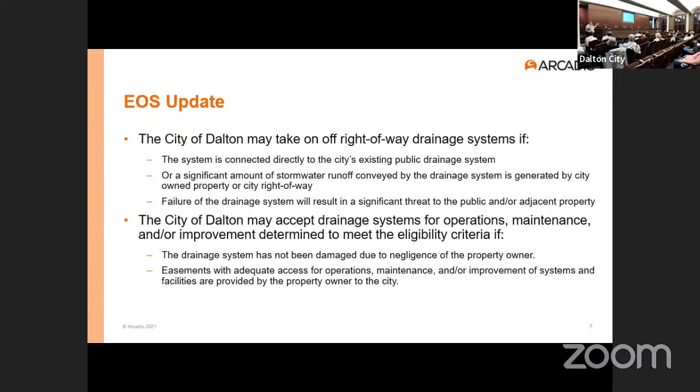And then the other condition is they need to have an easement. An easement is simply a written agreement between the property owner and the city that says here's where the city can work, here's what they can do, here's their responsibilities, so that they're not running all over your yard. It just kind of contains the area where they're responsible and where they're not.

All right, there are a few situations where the city and the taxpayers will not take on infrastructure. First one is non-residential property, commercial industrial properties. They're not going to take on Walmart's drainage system. Walmart's got plenty of money, they can pay for their own drainage. So that's a scenario where the city's not going to take that on.

And then the other one is if a drainage system is located under an existing building. In other words, somebody built a house, and just from a liability standpoint, it's really tough to work on those without causing damage. So they decided this is not one of those scenarios they really want to get in the middle of. If it's going under a home, you can really screw the home up just touching it.

So let's say we haven't met those criteria, but we've got some. So prior to the acceptance of a drainage easement, in other words, they say okay, we think this is our responsibility, public should pay for it, you guys are going to grant an easement if it's on your property. Then here's how the process would go.

Before the easement has to be accepted by the city council. This is not something that Andrew can sign off unilaterally on, or Chad could sign off on. It's got to go to the council. The public officials have to vote on this. The easement would be prepared, but before they do that, there's going to be a corrective action plan.

For those of you who may remember, Jackson gave a discussion not too long ago about the corrective action plan for this basin. He prepared this discussion so that the city council was informed about what potentially could go into this solution, so they can understand the risks and the potential costs to the taxpayers.

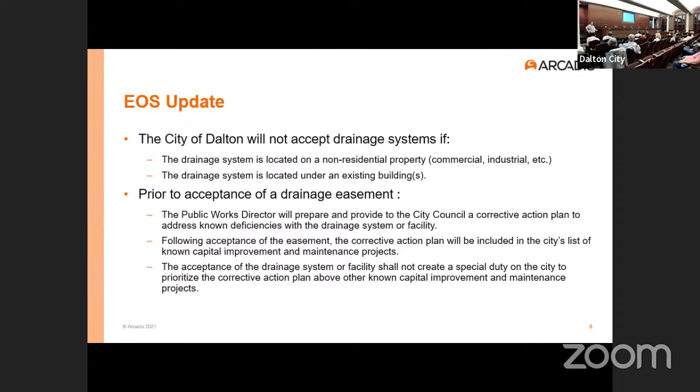But what it will not do is go to the very top automatically. So let's say you guys have been waiting for years for a project, and then somebody else gets an easement on the other side of town. Their project's not going to jump yours just because they got a project accepted. So there is a process that's going on for prioritization.

So that's EOS in a nutshell. And I just want to help you guys understand how we got to this place, because some of the infrastructure in the Walnut North Basin meets these criteria. And so that's why we're talking about this today.

As part of the city's effort, they've also been cataloging all the known projects, the known stormwater needs. To date, we've identified over 40 different needs in the city related just to drainage. Examples: we've got flooding of homes, flooding of buildings, streams that are degrading and threatening property. As the streams get washed out, they get wider, and could potentially impact homes and other property.

We've got failing infrastructure. Jackson, do you remember how many tier 1A metal pipes do we have in the city? Wasn't it like...

Yeah, we got 3,000 linear feet. Tier 1A pipe is a pipe that's under a road that if it fails, that road is cut off. People can't get in, emergency services can't get in, the residents are completely blocked off. So these are critical pipes that are metal, that are rusting, and Jackson went out and looked at a whole lot of pipes, and that is being programmed in potentially for lining at some point down the road.

So they're tracking that. They've got stormwater management infrastructure. We're trying to figure out ways to get the flows down in some of the cities, like think McClellan Creek. For those of you who heard that stream before, that's an example of where we're trying to do some infrastructure to help reduce the flow rates, to reduce flooding.

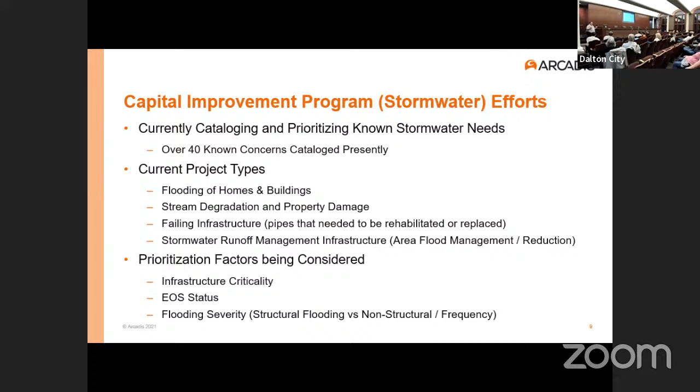All those are going to be put into a decision matrix that's currently being developed to help kind of identify, all right, we need to do this project, and this project. We don't want to say, sorry, your house has to keep flooding because we did some lower priority project first. So we're trying to be smart about how we're spending the money. So I just wanted to kind of lay out that and understand how the city's making decisions on these projects.

We do have some projects, and I think Jackson, why don't you go ahead and come on up. Talk about some of the successes and some of the current efforts. Obviously, the last bullet there, you guys will probably recognize in this meeting, but Jackson, why don't you go through this? And then after Jackson talks, Alex is going to come up. He was the principal modeling engineer on y'all's project, and he's going to walk you through everything that we looked at as part of this solution and then what the recommendations are moving forward. Thanks, buddy. Thank you, Rich.

Good evening, everyone, and I want to thank everybody for coming out to understand the efforts that the city has going on with our stormwater efforts. And I'm going to go ahead and give you a brief overview of the current projects we have going on in the city, as well as the recently completed projects.

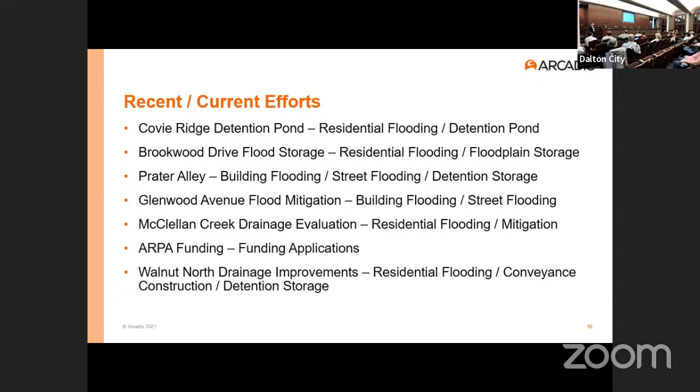Starting with Covie Ridge. This is a particular location residing within the Mill Creek watershed where there were significant residential flooding hazards. And what the city has done is acquired undeveloped property and has developed a detention pond upstream from these sensitive areas in the residential area, as a means to attenuate the flow and to mitigate the flooding hazards within this drainage basin.

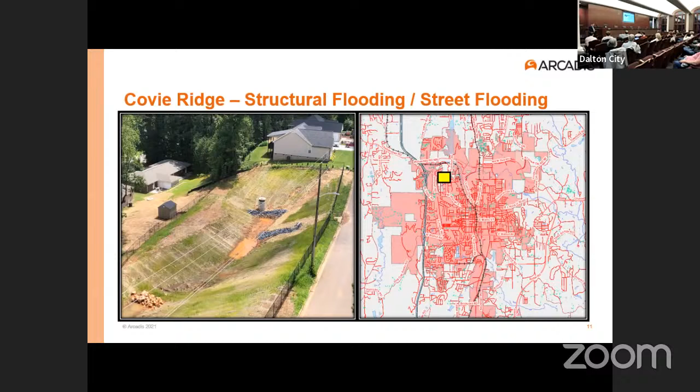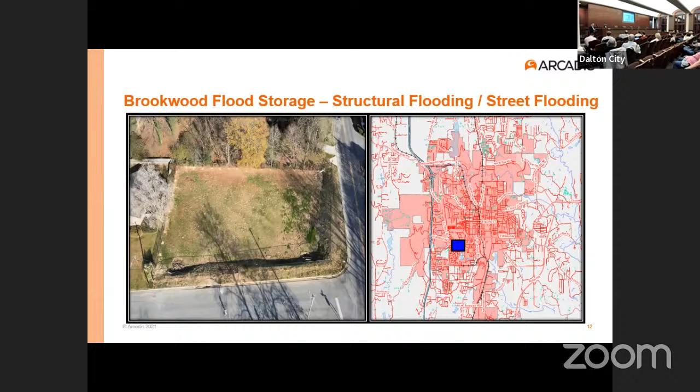Second one that was completed recently was the Brookwood flood storage project. This is a particular location where once again, you had residential structural hazards that were caused due to the geographical location of this drainage basin. And under voluntary participation of the property owner, the city acquired his property and removed the impervious surface, displacing water within the floodplain and providing a flood storage area to help as a staging point for peak flow events before it reaches Tar Creek. This particular location is a prime example of a floodplain restoration project, since this property was located directly within a floodplain.

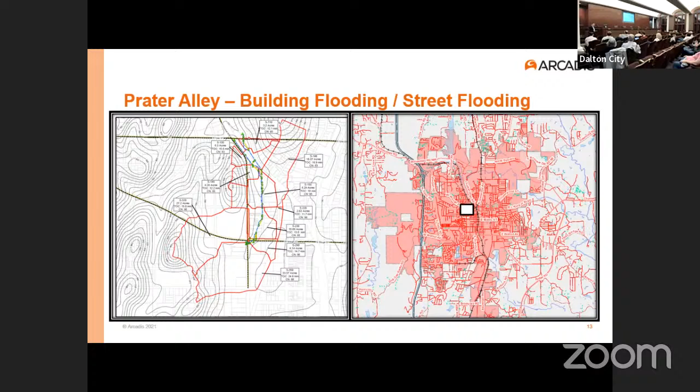Now we'll move on to the projects that are in the design phase. Starting with Prater Alley, this is a particular location where there's been multiple reports of flooding concerns as far as structural flooding as well as street flooding. And what we are currently working on with Arcadis to design is an underground detention system upstream from these vulnerable locations, in the hopes to attenuate the flow as well as to mitigate the flooding concerns downstream from this drainage basin.

Next we go to is the Glenwood Avenue flood mitigation project. This is another situation where you have a structural flooding concern where a structure is frequently becoming inundated with floodwaters, as well as street flooding. At this particular location, we're working with Arcadis to develop infrastructure that will be able to take the amount of conveyance runoff from these drainage basins.

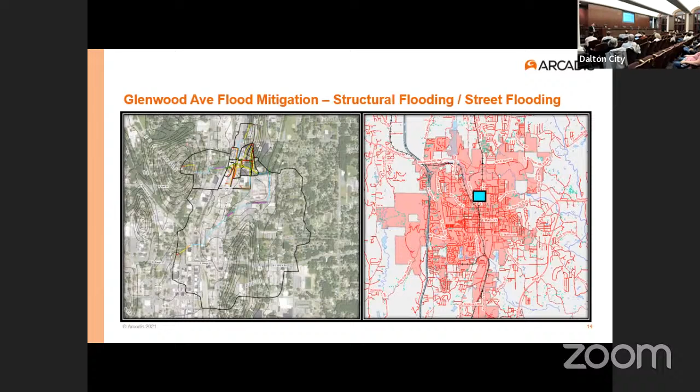Next is McClellan Creek Drainage Basin Evaluation, and this is part of a larger scale work that Arcadis is currently working on as part of the flood abatement plan, where they're going to be evaluating the entire drainage basin and be able to pinpoint the best places to implement stormwater attenuation strategies to provide the best flow attenuation and strategize from that point.

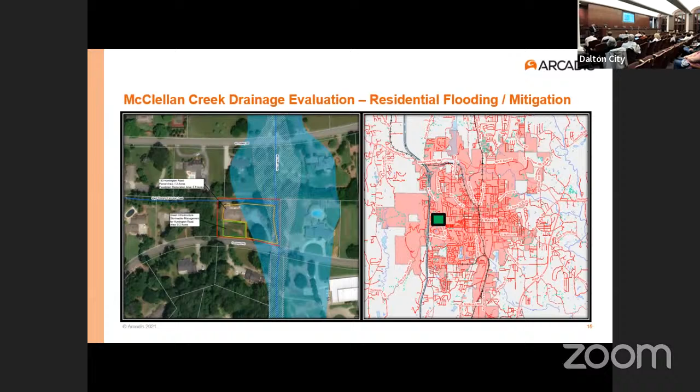And this visual you see here is a location where the tributary stream comes in and enters McClellan Creek. This area is prone to flooding, and we have submitted an ARPA grant, which I'll get to in a minute, for this project similar to the Brookwood project, where it's a floodplain restoration project where we're removing the impervious surface as well as looking at implementing a retention reservoir on the site.

Now we get to funding. The city has been working with a team from Arcadis who specializes in grant funding. And one that we've recently completed applications for is the American Rescue Plan Act. This is a funding grant that provides infrastructure improvement funding, in particular for stormwater.

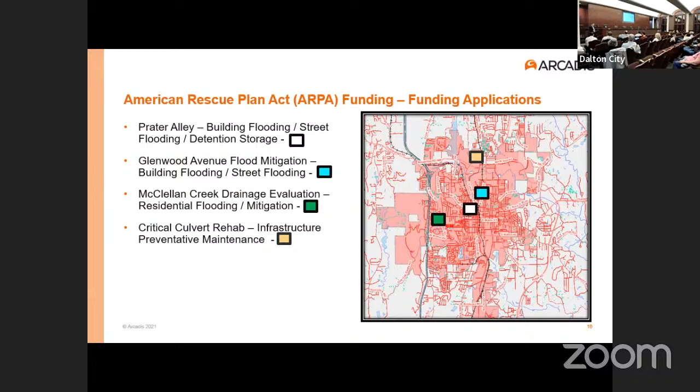And so we were able to work with their team and develop applications for a few of the projects that were mentioned previously: Prater Alley for the underground detention storage, Glenwood Avenue for the conveyance infrastructure improvements, and McClellan Creek for that particular property within the floodplain rehabilitation. And lastly is a project for critical infrastructure where, due to location and its alignment with structures, it's deemed necessary to be proactive and move forward with implementations to repair the existing failing infrastructure.

Now we'll move on to the Walnut North Drainage Basin. So at this particular location, the city is already committed to implementing the drainage improvements within the West Hill Cemetery. This is unique where this is a large drainage basin prior to entering residential areas where water is conveying through city property. And so what we're looking to do is everything we can to improve that on our side, on city property, as a start.

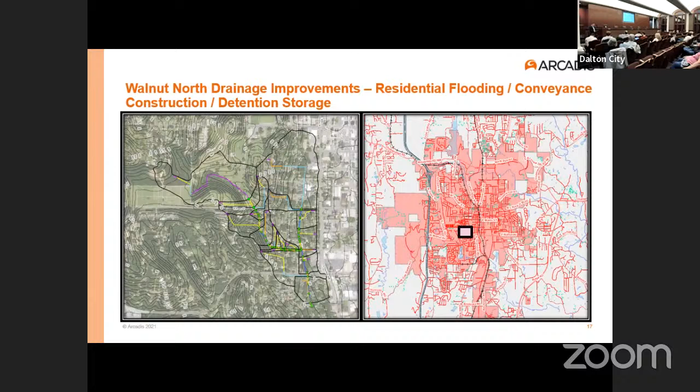So in summary, I just want to give you a general picture that this is a citywide effort. There are multiple locations with flooding hazards, with structures that are in danger of flooding. And this is the reason why Walnut North is also on this list, because of that issue and the sensitivity of that area. And with that, I'm going to pass it off to Alex.

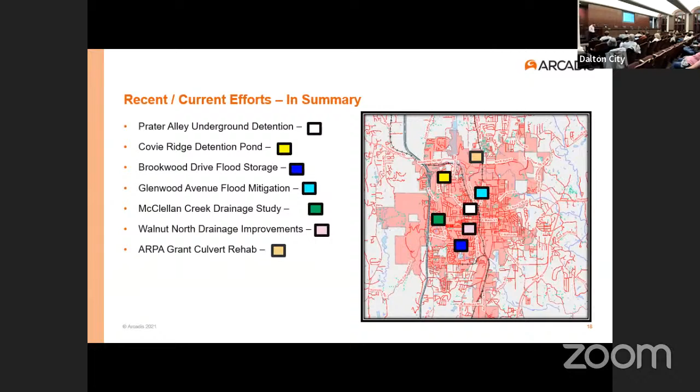So first, I want to take a step back and look at this Walnut North Basin from a bird's eye view and what all goes into this drainage study. What we did was compile a bunch of different data: survey, city records, historic rainfall data, historic flood records, and we start piecing all this together. And we look at building a computer model of the entire watershed.

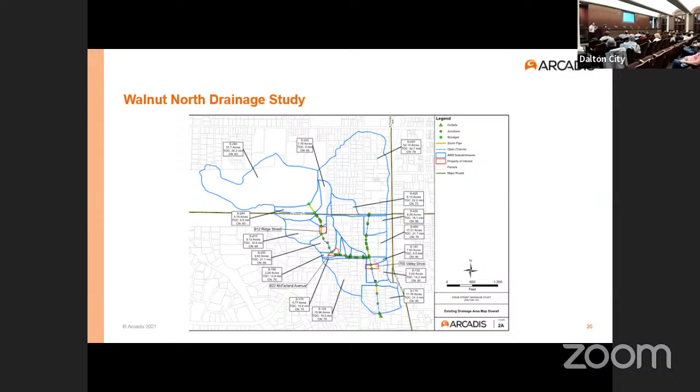And you'll note that this watershed is over 200 acres that drain down to Walnut Avenue. So we're talking serious contributing drainage areas, particularly over 50 acres that drain down from West Hill Cemetery into the residential community. So these are the kind of things we start looking at from a very bird's eye view and then are able to drill down into more details.

So I'm going to briefly touch on the main objectives of the study and what went into it in terms of parameters, and then ultimately our goals. We wanted to understand in detail the drainage system from the top of the watershed, which starts at West Hill Cemetery, and then model that down to Walnut Avenue to see the performance of the existing system. We wanted to use a computer model so we can test different scenarios within the basin.

Our main goals are to look at reducing structural flooding. As Rich mentioned, that is a high priority where we have stormwater around and in structures. We wanted to find ways that we could more efficiently manage the infrastructure and manage the runoff. And we also wanted to extend the infrastructure's life expectancy, since this is infrastructure that's put in the ground and has to be maintained long-term.

So some of our primary parameters that constrain this study: we wanted to look at solutions that were not going to transfer problems downstream. That's a main benefit of doing a watershed study like this. We can look at what's going on at the top of the basin and at the bottom of the basin, and make sure we're not transferring one problem on one street to the next street down.

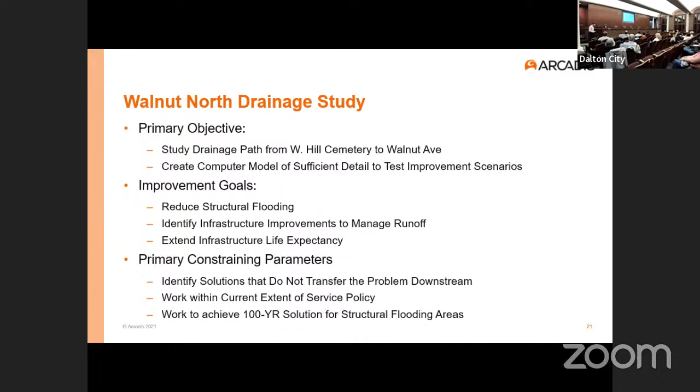So we'll talk a lot about a 1-year storm, a 10-year storm, a 100-year storm. What does that mean? So a storm frequency is its probability to occur at a given time. So it's not necessarily that a 100-year storm will only occur once in 100 years. It could happen in back-to-back years. It's strictly a statistical probability of that storm.

Whereas a 100-year storm is almost 8 inches of rain in a day. So that's going to be a bigger event, a more severe event, possibly some sort of tropical system or something like that. And a lot of times you'll hear a 100-year storm. That's what FEMA floodplains and those type of mapping efforts are looking at, the 100-year storm.

Another thing to note, as we were doing this study, we had a couple different historical events that were recent that we were able to test and model and get rainfall data for. One was in April of 2020, which was approximately 6 inches of rain in 24 hours. So that would equate out to a 25-year storm, so between a 1-year and a 100-year. That's a significant amount of rainfall.

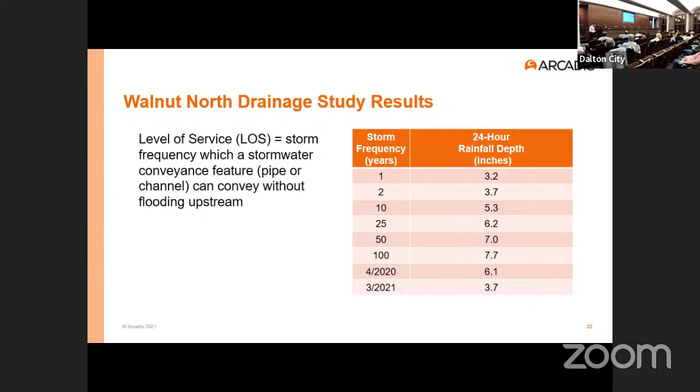So we looked at several different scenarios to improve the drainage conditions in the Walnut North Basin. The first scenario that we wanted to test was primarily focused on the properties along Ridge Street, just south of Emory Street, where there's existing infrastructure in residential backyards, and there's documented flooding in those properties.

So we wanted to test the scenario and say, okay, if we came in and just upsized those pipes, right? Bigger pipes, let's let the flow go and improve the capacity of the system. We want to see what that would do, with our goal, again, to reduce the structural flooding during a 100-year storm event. So this would include replacing pipes from West Emory Street down to the end of Ridge Street in the existing backyards.

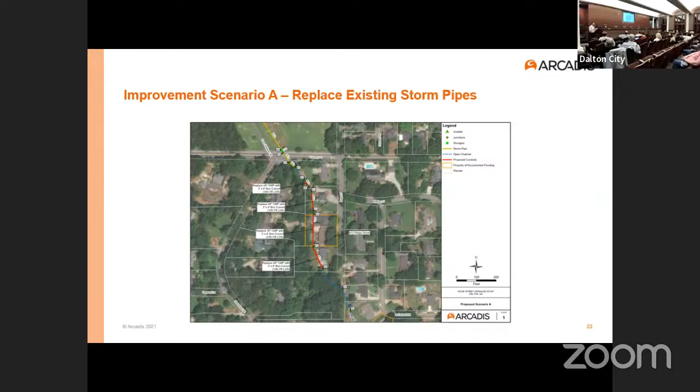We do see that for the properties along Ridge Street, we were able to achieve a 100-year level of service, a huge increase from the current 1 to 2-year level of service. But we wanted to test some other scenarios as well and see how we could address some of these peak flow increases that we were seeing downstream. And again, just in summary, this is what we call our scenario A, which was the capacity improvements along Ridge Street.

And some of the advantages, as I mentioned, it achieves a 100-year level of service for the properties along Ridge Street and reduces the flooding there. But some of the challenges would be significant work on private property. So these would be large pipes on private property, having to work around existing structures, the long-term maintenance of those pipes on private property with challenging access conditions. And again, as I mentioned, the transferring of flooding and problems downstream from this scenario.

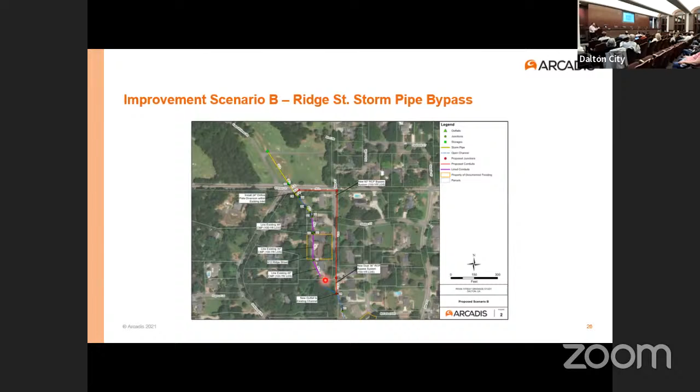We saw similar levels of flood reduction as the scenario A that I previously discussed. We could achieve a 100-year level of service for the properties along Ridge Street. But as I mentioned before, we're still seeing these red numbers in the model printouts, which is indicating that flow is being increased downstream.

So again, the advantages of scenario B, simply bypassing the flow down Ridge Street, we can provide that 100-year level of service and reduce flooding. And most of the work would be in public right of way because the new system would run along Emory Street and then down Ridge Street. But the main challenge was it could still transfer problems downstream.

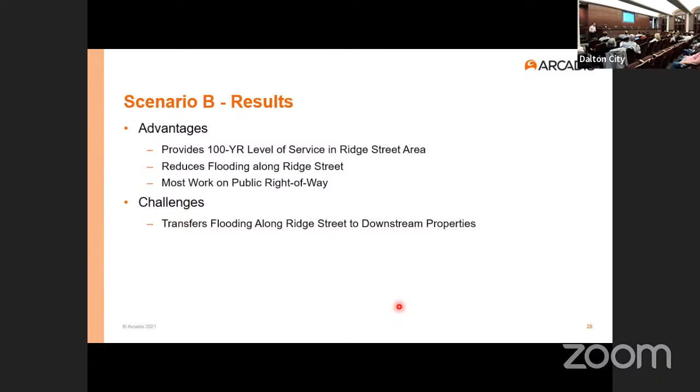So this is where scenario C is where we started getting out of just typical pipe and conveyance improvements. We started to see, okay, we know we have a lot of water coming down into this area. What can we do to more efficiently and better manage this water before it gets to some of these problem spots? So in scenario C, we went up and did a survey and detailed investigations up in the cemetery just to see how much water is coming down and where could we add some more storage.

And you'll hear detention storage. And all that is just room for water to be stored during rainfall events, and then it can be slowly released instead of coming in on an onrush during like a flash flood situation. So we wanted to look and see where could we provide some more storage to let water be stored in the cemetery and be slowly released downstream.

And what we came up with was a few locations where there's actually some existing basins in the cemetery, just north of West Emory Street in the blue, that could be expanded. And then this green area further to the north is an existing ditch. And I'll get into details about this project in a bit, but that's actually going to be a series of what we call regenerative stormwater conveyances, which help slow the water down before it gets further in the watershed.

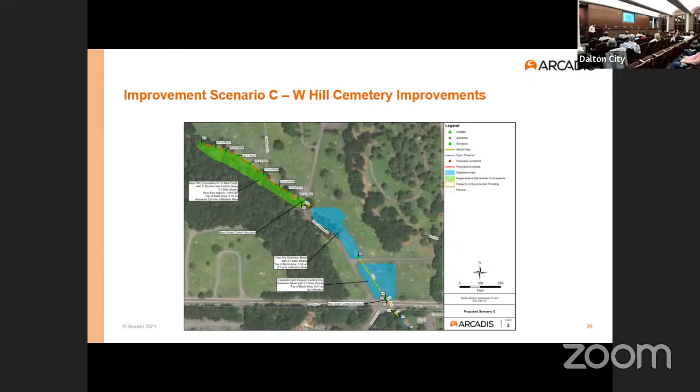So we found that with this scenario alone of just adding in storage up in the cemetery, we could actually improve the performance and the level of service of the drainage infrastructure along Ridge Street, McFarland Avenue, and even down into West Franklin.

So it would not achieve the same performance level and level of service as the pipe capacities I was mentioning in scenarios A and B, but we could still take the level of service up from an existing 1 to 2 year level of service, as I mentioned before, up to a 5 to 10 year level of service. So it is moving the needle to be able to take some of that runoff off the system and slow it down before it gets down to Ridge Street, McFarland, and West Franklin.

So again, advantages to adding storage up in the cemetery. It provides some level of performance increase to the existing infrastructure that's in the ground today. And most of the work is on public right of way. It's in the cemetery. But the main issue is it's still not providing that significant structural flood protection that we were talking about with the 100-year storm.

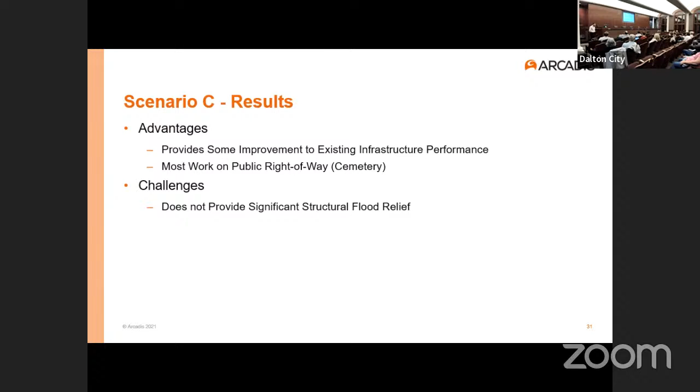So that's where we had to get a little more creative and trying to look at how we can piece things together. So the next scenario that we analyzed was taking the West Hill Cemetery storage and then combining that with the scenario B, the Ridge Street bypass system, the pipe along Emory Street and Ridge Street, and combine those together to see how they would perform.

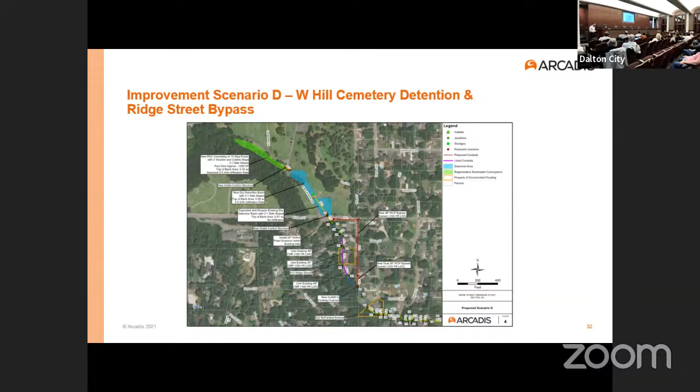What we found was that we could provide a 100-year level of service for the structures and properties on Ridge Street with this combination. We could still slightly improve some of the drainage conditions on McFarland and West Franklin by increasing the performance of those systems slightly. Most importantly, we would not be transferring the problem downstream. So these two scenarios are working hand in hand: one allows the system to be improved in its capacity performance, and the other slows down the runoff so the problem isn't transferred downstream.

So the scenario D advantages: we're addressing the flooding adjacent to Ridge Street, we're not transferring that problem, and we're providing some slight increase in performance of the downstream structures. Most importantly, the work is in the public right of way.

Now, the other main challenge we noticed was that it's still not providing significant structural relief for flooding downstream of Ridge Street. So McFarland Avenue and West Franklin Street are not getting up to the 100-year level of service that we mentioned before.

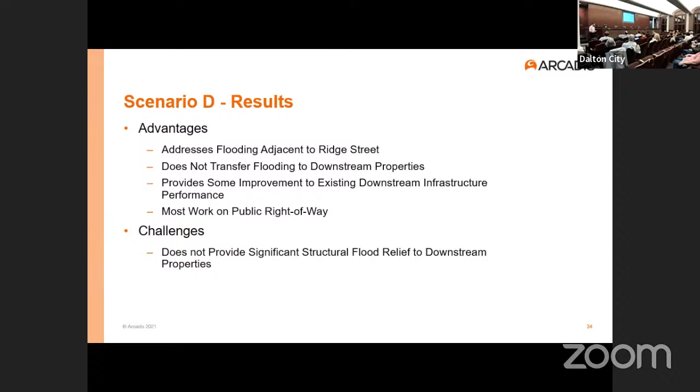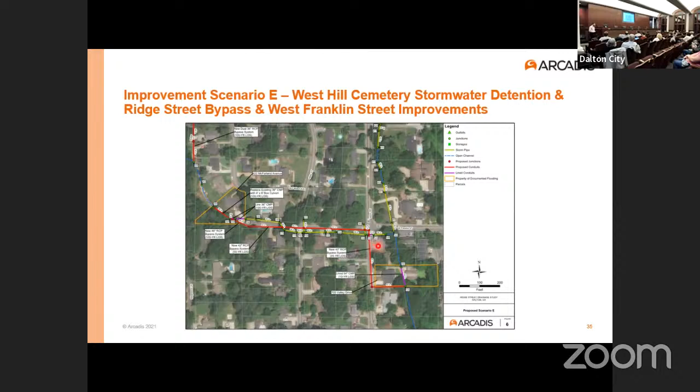So this is where we add one more portion of improvement downstream of Ridge Street, starting along the western edge of West Franklin Street, including pipe capacity improvements along West Franklin down to Valley. This would work in conjunction with scenario D to provide increases in level of performance for properties along West Franklin, McFarland, and Valley.

So with this scenario E, we're able to achieve a 100-year level of service along Ridge Street, at McFarland, along the western edge of West Franklin, and then increase the level of performance to a 50-year at Miller Street and West Franklin, and to a 25 to a 10-year down at Valley and Walnut.

So this is able to move it up into that target level of performance we were looking to achieve, 100-year for the structural flooding, while also, as you'll note, there's no red numbers here indicating a transfer of the problem downstream.

So as I mentioned, we're addressing flooding along Ridge Street, along West Franklin, McFarland, and Valley as well. It has the advantage that most of the work is in the public right of way, and we're not transferring the problem downstream.

The most significant challenge here is that this is a significant investment. This is a lot of infrastructure, hundreds of feet of pipe, detention storage in the cemetery. This is a big investment in the stormwater system in this area of the basin.

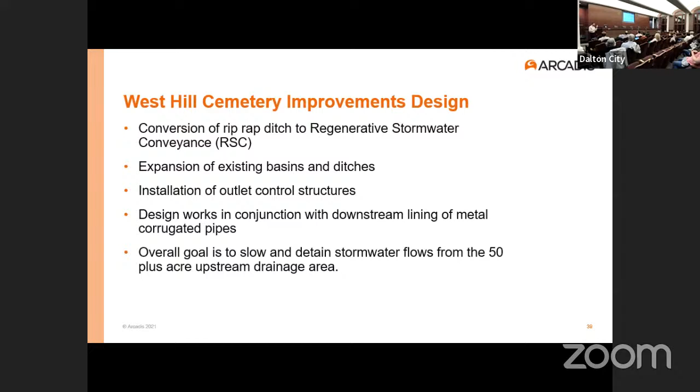And the overall goal of this project, the West Hill Cemetery Improvements Design, is to slow and detain stormwater flows from the 50-plus acre drainage basin in the West Hill Cemetery.

These are built in the existing channel and they help trap water, allowing it to slowly infiltrate and be absorbed by the ground, with some evaporated. They slow down that water that's currently just ripping down the ditch, and along with that, they provide some storage in the pool itself.

These are really great projects. We've done several in the Mid-Atlantic area, and they're growing in popularity because a lot of times there's also erosion issues in these areas, and this type of solution can address erosion as well as water quality. The water is actually being treated as it's going through these pools, and it can provide habitat for birds and things like that. So they're definitely growing in popularity.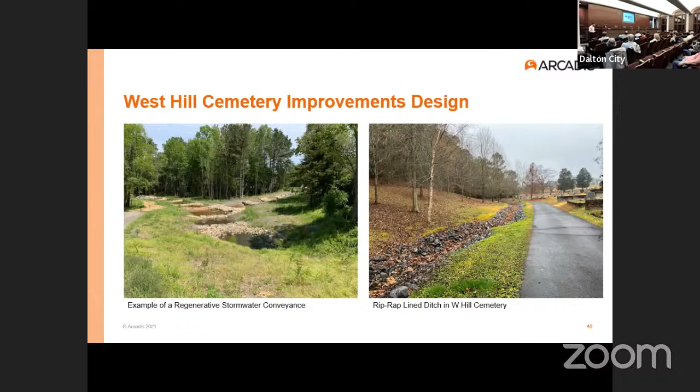The other aspect of the West Hill Cemetery design is the expansion of the existing basins that are out there. As y'all have probably seen, these depressional areas are currently functioning as a stormwater basin in their current capacity, and we would look to improve that by digging them out and making them slightly deeper.

But the main thing is we want to be very careful, since we are working in a cemetery. We went out and got lots of survey data, actually did ground penetrating radar to detect if there were any graves or unknown things underneath the ground that we would be digging around. So we wanted to be very cognizant of that as we were putting together these designs.

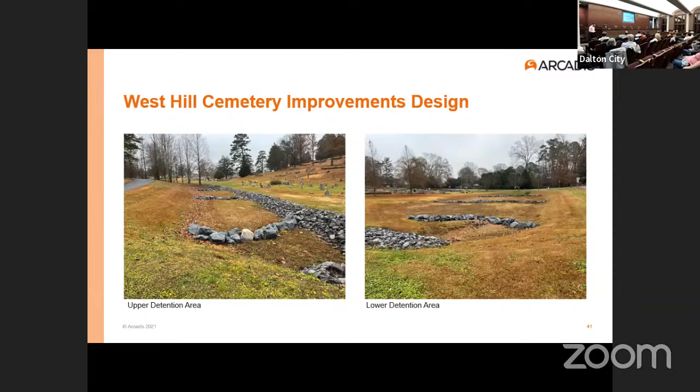So the overall benefits of what this West Hill Cemetery project is going to bring to the table: reduction in peak flows from the current rates being released downstream in the basin, and an increase in level of service for the downstream pipes and infrastructure. A few of note: at 612 Ridge Street, where there's current flooding, it has less than a 1-year level of service.

So that 3 inches of rain is enough to cause flooding—the water comes out of the system there. That would be increased to a 10-year level of service by adding this detention and cemetery improvements.

At 622 McFarland, again, a 1-year level of service would be increased to a 2-year. But the critical thing is this is the first step in reducing flows to allow more downstream storm pipe and capacity improvements to be undertaken without increasing downstream flows and transferring problems in the basin.

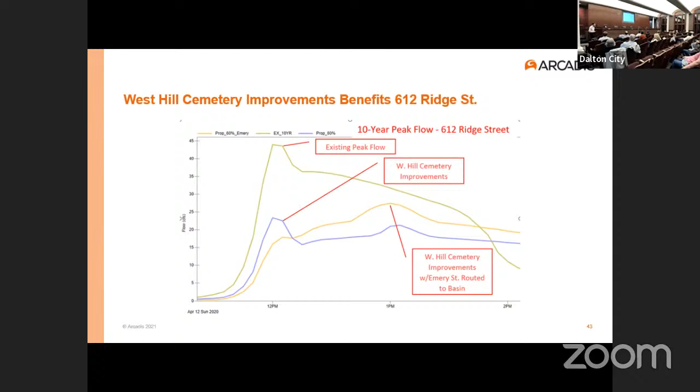Similarly, we looked at larger storms, such as the 50 and 100 year. Again, we saw that the performance of the basin taking just the cemetery drainage was greater than diverting both the cemetery and West Emery Street drainage into it. This is because the basin will fill up earlier in the storm and not be able to provide storage for the larger volume and rate coming down from the cemetery during a large storm.

The other things we looked at in great detail were the performance of the system improvements up at the cemetery on some of the existing infrastructure. A particular note was there's an existing open channel drainage ditch behind 622 and 620 McFarland.

That ditch currently conveys runoff from this location in the watershed and runs it down to West Franklin. So we wanted to look in great detail at what these improvements would do to the performance of that open channel. We can actually see that with the detention up in the cemetery, rates would be decreased significantly from existing conditions.

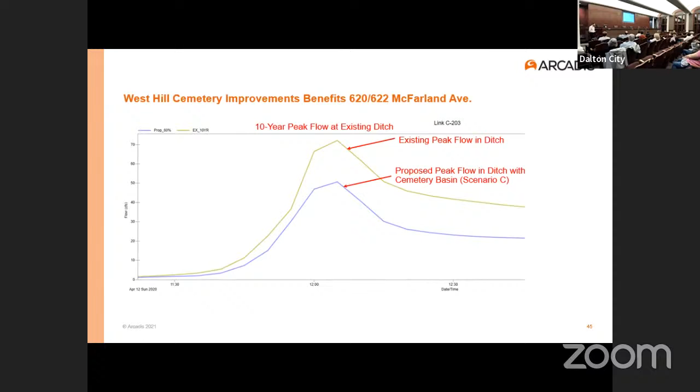So that was definitely a bonus of adding this detention upstream. In particular on this ditch even more, looking at the full scenario E, which combines the detention in the cemetery, the bypass of stormwater flows on Ridge Street, and the downstream improvements on West Franklin, we found that flow depths in this ditch during the 10-year storm—again, about 5 inches of rain during a day, a significant storm event—could be reduced by 1 foot by these improvements. So even though nothing is necessarily being proposed with this channel, the improvements upstream and downstream all work together to help the whole system perform better.

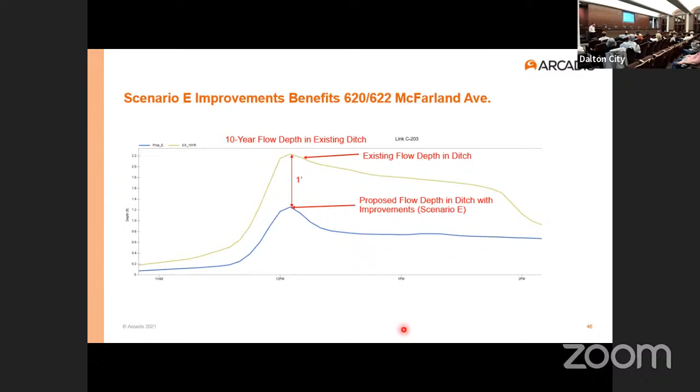Just to go into a bit more detail on the future efforts, as I mentioned, West Hill is kind of like a first step to allow us to open up to more downstream improvements.

The Ridge Street bypass would pick up drainage coming from the cemetery and West Emery Street, direct it east on West Emery, and turn down Ridge Street. That'd be approximately a 48-inch diameter storm drain, so a pretty decent sized storm drain underneath the roadway, that would convey a majority of the upstream flow coming from the cemetery and roadway, providing a 100-year level of service for the properties along Ridge Street.

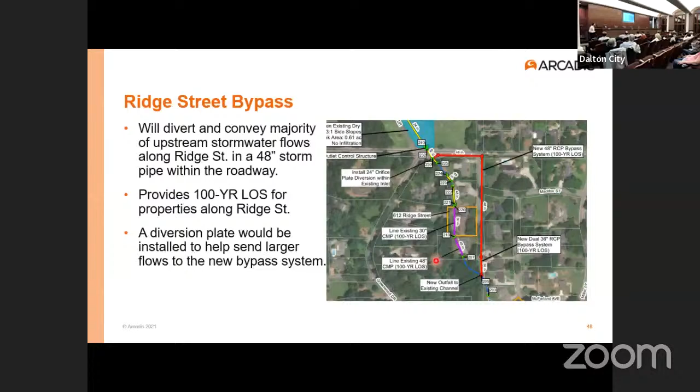There would actually be a diversion plate—we can put these into drainage structures to cause the flow to turn and go in a different direction. What that would allow us to do is divert that flow down Ridge Street and around the existing flooding problem.

The other downstream improvement would be the West Franklin Street system improvements. Currently there's a drainage line going down West Franklin that snakes back and forth from the north side to the south side, and then eventually goes down to an open channel behind the properties on Valley. What we'd plan to do is pick up the open channel that runs currently down behind the properties on McFarland, and improve the existing culvert entrance that is currently a 36-inch culvert.

That would be upsized to a larger box that would be more efficient to get that water into the system, and then a parallel storm pipe would be added along West Franklin. That would be put in parallel with the existing pipe to more than double the capacity of the existing system on West Franklin, providing a 100-year level of service for the properties on McFarland and a 50-year level of service for flows in the street down West Franklin.

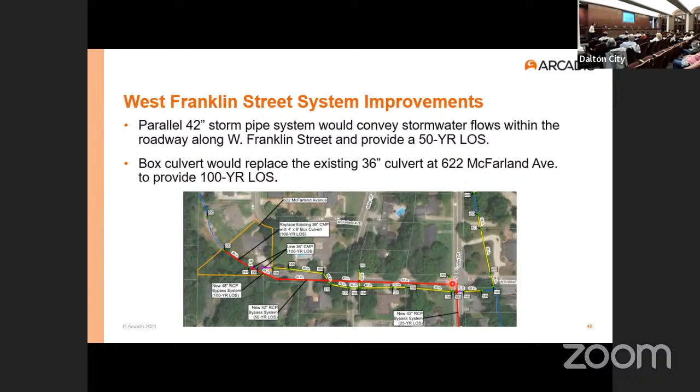And lastly, Valley Drive system improvements. This is the last downstream leg of this plan. It would include a 42-inch storm pipe that would connect at West Franklin and Valley and convey flows south on Valley, then return those flows to the existing open channel behind the properties on Valley. This would provide a 25-year level of service for the properties on Valley Drive, which are currently at a 2-year or less level of service, and would also help stabilize the existing channel behind the properties on Valley.

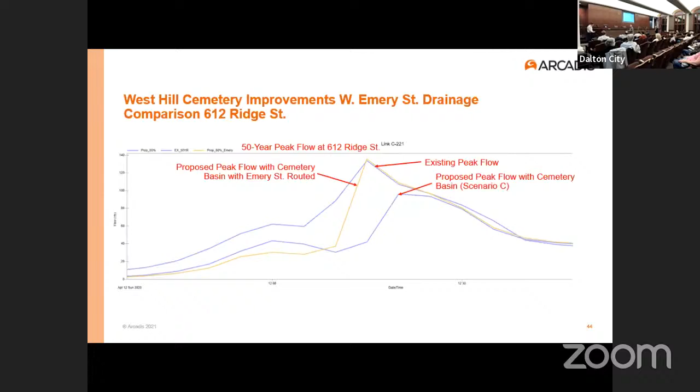My name's Bruce Jennings. Before I retired, I was an architect. I just realized this is the first time I've ever spoken in a building I designed, so you guys did a great job on this, but I'm the guy down at the butt end. I'm at 707 Valley Drive. I'm sorry, can you hear me now? Okay, thank you. I live at 707 Valley Drive.

There is a ditch from 705 Valley Drive that runs to Walnut Avenue. There was a culvert that was under 705 Valley Drive, which is now approximately 150 feet down the creek. I'm going to go through these very quickly. I'm going to hand you some photographs.

The first one you see is the ditch behind my house. When I moved in, I put a chain link fence along the edge of the creek, about 2 feet off the creek. About 10 or 12 years ago, 160 feet of it ended up in the creek. Got most of it out, had to replace the fence.

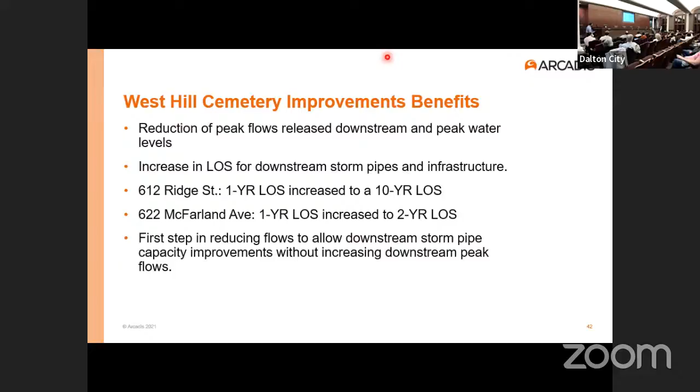Thank you, Mr. Jennings. And I will say, I applaud the council 13 months ago for giving us the tools to be able to engage with you to get easements that we need. So I think in that particular scenario, that's certainly a candidate if we go ahead and get the easements to enter early. And then I wanted to let maybe Alex or Rich, or even Taylor from a design perspective, address the question about the pipe coming in at 90 degrees, how we would try to keep that from being an issue.

If I might add one thing, the only way to get riprap to that ditch is to start at Walnut Avenue and cut down trees and build a road, or come across my property and do the riprap of the ditch. Those trucks are going to be heavy. So before you can run the culvert from Valley Drive down to the creek, you're going to have to bring the riprap in first, because those riprap trucks will crush the pipe that you would be putting in. And I hope there'll be some kind of baffle system in that pipe to slow that water down. Thank you. Alex, do you want to touch on that?

So the extent of our study definitely covered your location, and we're looking at flows, and we're looking at the stormwater model in that area. I think the biggest thing with that system would obviously be some sort of energy dissipation, which is used to help slow the velocities of the water down as it's coming out into the channel. Also, structural stream bank stabilization.